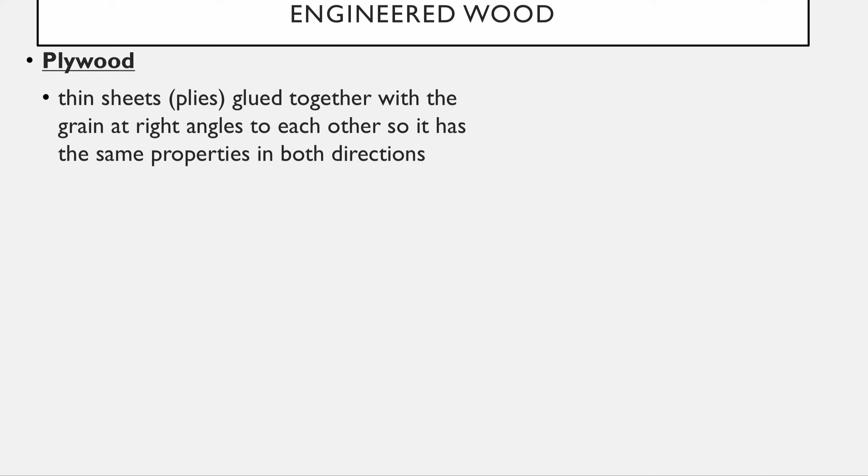One of the most common forms of engineered wood that most people are used to seeing out of chapter 1013 here is just plywood, where plywood are just thin sheets of ply that are glued up together. But what's really important is that you do at each layer turn the grains 90 degrees so that you get the same properties no matter how you cut that board and put it up. It has the same strength from either direction.

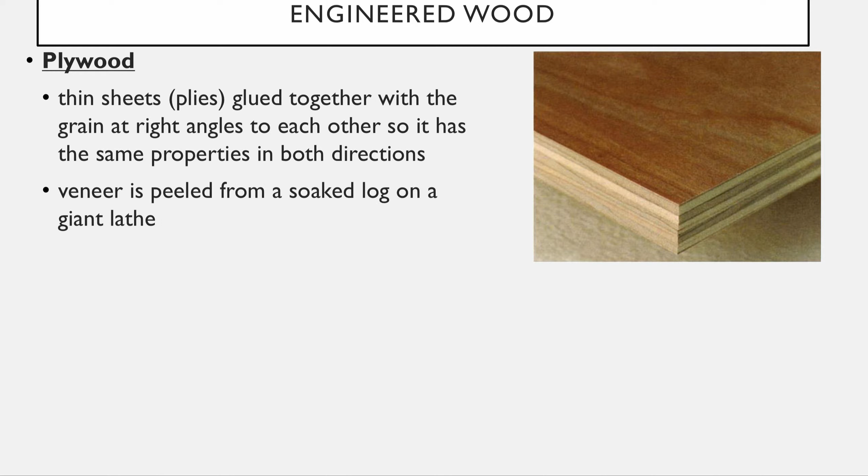To get the veneer that we make these out of, they actually soak logs and then they spin them on a giant lathe with a knife that just peels the layers off. Hopefully you've watched the quick videos on how different engineered lumbers are made and saw this process. But I do want to point out that it's not just plywood that comes out of this veneer.

There's also laminated veneer lumber, and that lumber would be shaped either into plywood, but it also can be shaped into beams and is definitely often used as beams or the top and bottom flanges in I-joists that we're going to get to.

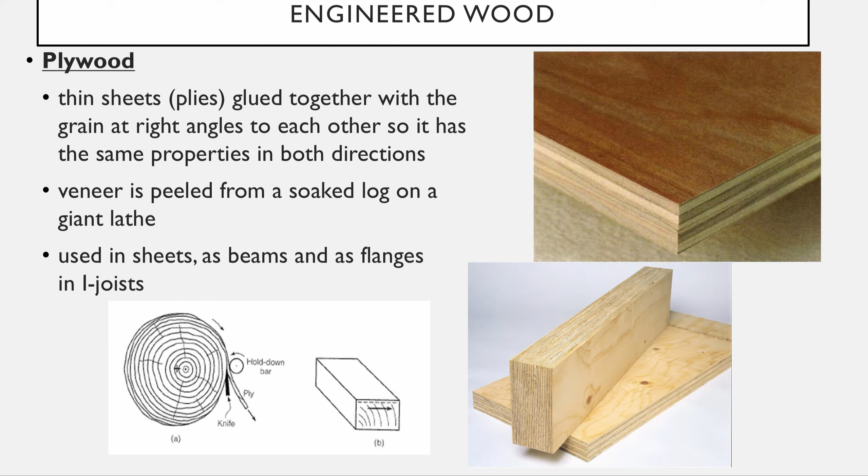Now, the additional boards that you might have out there is particle boards and chip boards. These are not structural members. Particle boards might be used to make that cheap furniture that has the plastic laminate over that maybe you have in your cabinet or your dorm room. And that's got no structural property to it.

Chipboards sometimes get used for the more inexpensive cabinets you might find in a home store. The problem with chipboard is when it gets wet, it expands, not very useful. But the way chipboard's made is it is just using wood chips glued together, but it's all randomly oriented. There's no structure to how the chips are laid down.

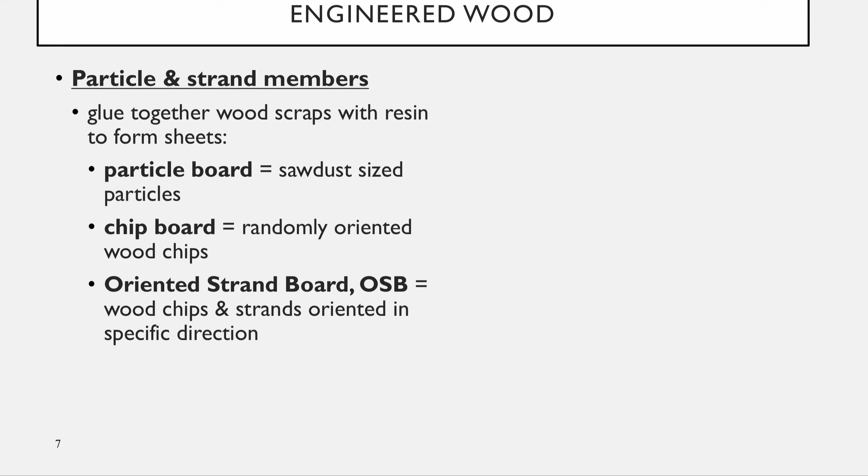Versus oriented strand board. In oriented strand board, the strands are oriented in a specific direction to make sure we're getting strength in that direction, and there's a whole lot of glue that's used and a lot of pressure to create these boards. In addition to making plywood using this oriented strand method, you also make beams called parallams where the wood chips and strands are oriented down the longitudinal axis of the board, and you can actually make very strong beams out of this.

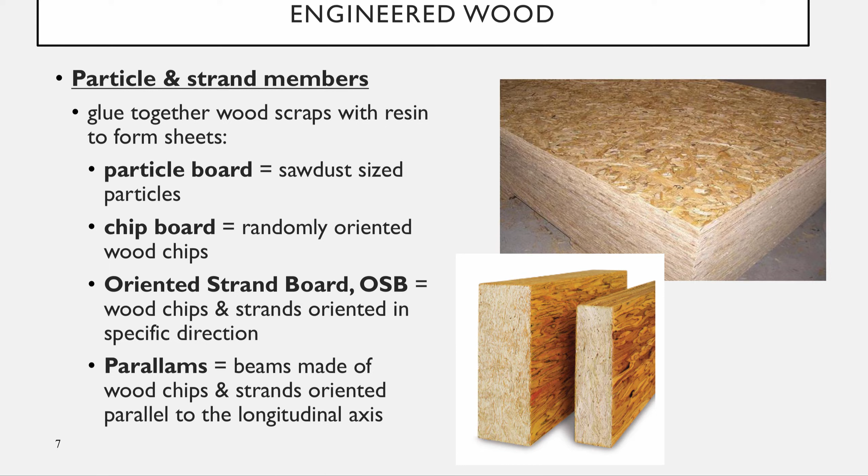One of the things you have to be very careful with oriented strand board is it's less expensive than plywood, so you will see a lot of contractors using it, but this is not good when it gets wet. So if you've put it up on your roof and you haven't finished your roof off yet and a rainstorm comes, or you get a roof leak later on, you can get problems with the structural integrity as that glue gets wet and you can damage the board.

All right, we mentioned earlier that you can use that laminated lumber in your I-joist. Well, here is an I-joist. And so you have these top and bottom flanges. Now, originally, those were made from 2x4s or 2x6s that were notched, and then you actually put plywood in the middle as the web.

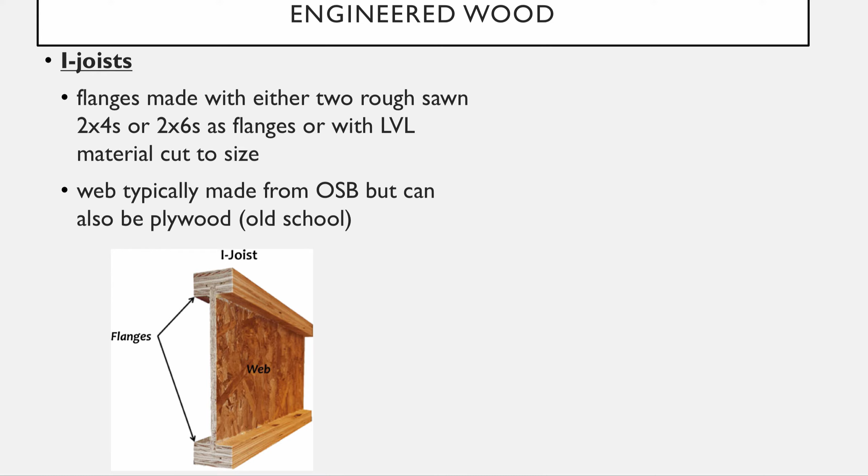Newer technology or just newer methods, typically you might have the LVL material instead, that laminated veneer lumber, as your top and bottom flange, and then your webs today are typically out of the oriented strand board. And these are I-joists used typically sometimes for your roof beams, but definitely for second story or first story over a basement floor beams because they're very strong for a much smaller amount of wood.

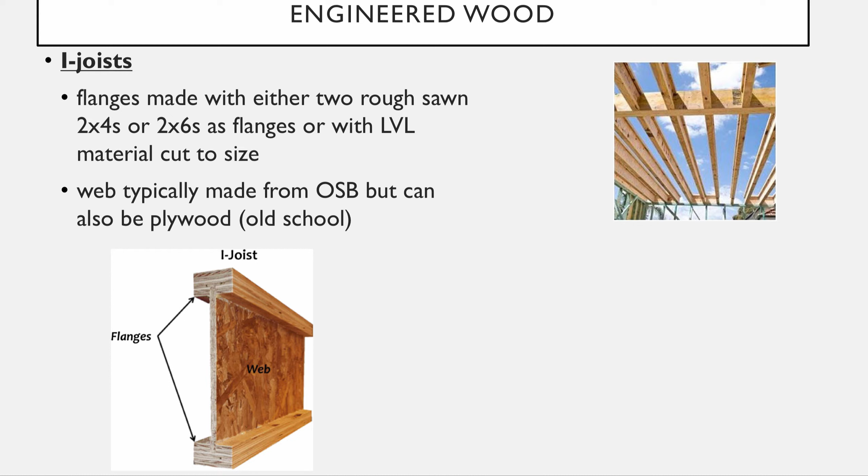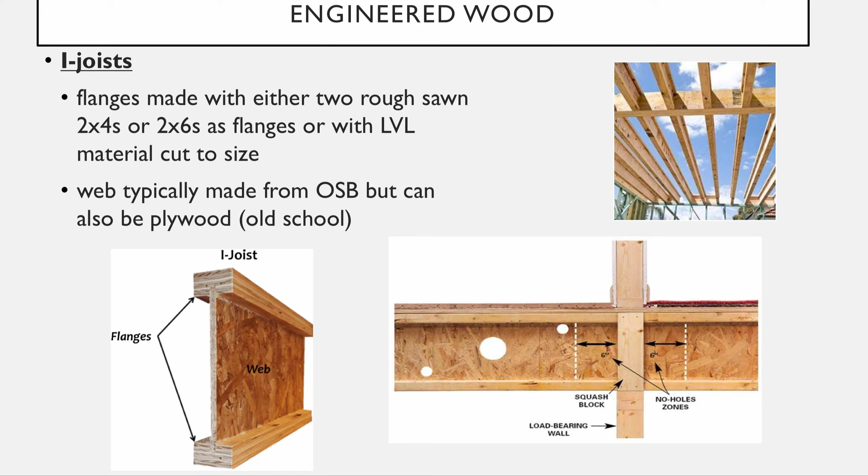But you have to be very careful where you cut them, and so you'll get directions on where you can put holes in them if you need to run electrical or plumbing horizontally through the ceiling or the floor below.

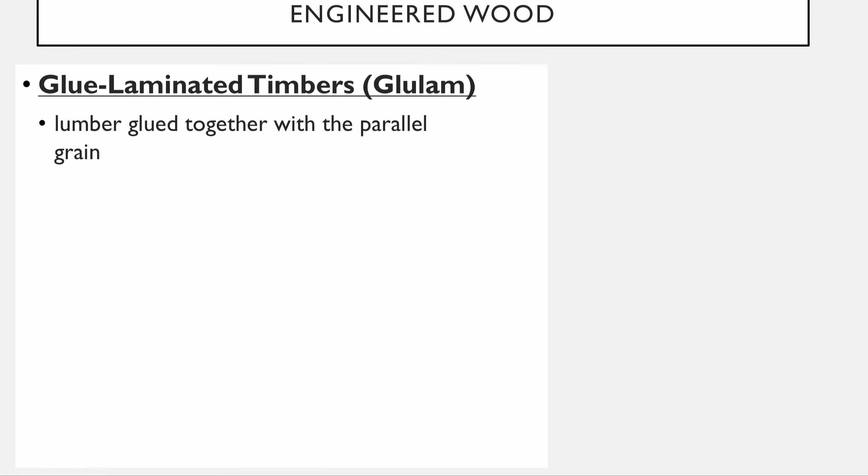And then the final, most common engineered lumber that's been around for a very long time, which is our glue laminated timbers or glulam beams. And this is literally taking a 2x4 or a 2x6 and just gluing them up to make something bigger. I'd be surprised if everyone hasn't seen one of these somewhere.

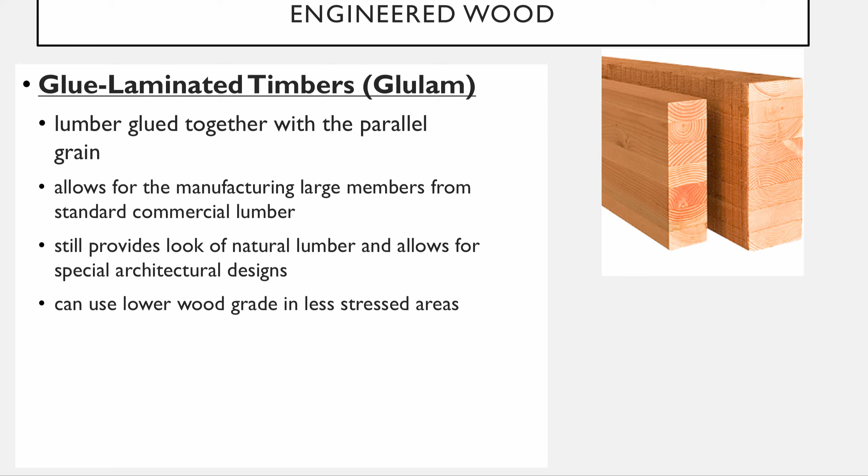They're beautiful, and that's one of the advantages for them because you can make very large members that look relatively natural and allow for really special architectural designs, but you're not using big trees to do it. And the nice thing is you can actually use your cheaper wood in lower stressed areas. So if we look at this image from your textbook, just to explain why this is so important.

And so, in fact, it's interesting. We can see nice tight grained wood. There's a lot of heartwood here. Up here, I have very open, fast growing wood. So I would say this is probably an unbalanced beam.